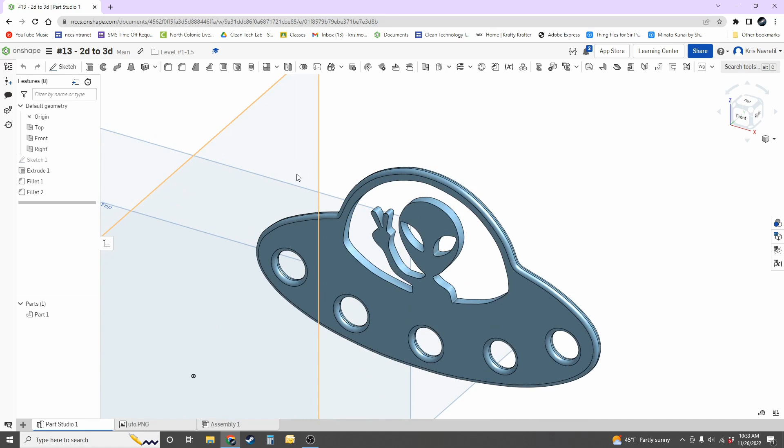In this video we're going to be taking a look at the next part in our Onshape series, the next level. And this one is going to be pretty simple. It's just taking a 2D image and essentially making it into a 3D object. Now we've done this a couple different times, a couple different ways. We've done it with the keychain, and we've also done it technically with the screwdriver handle.

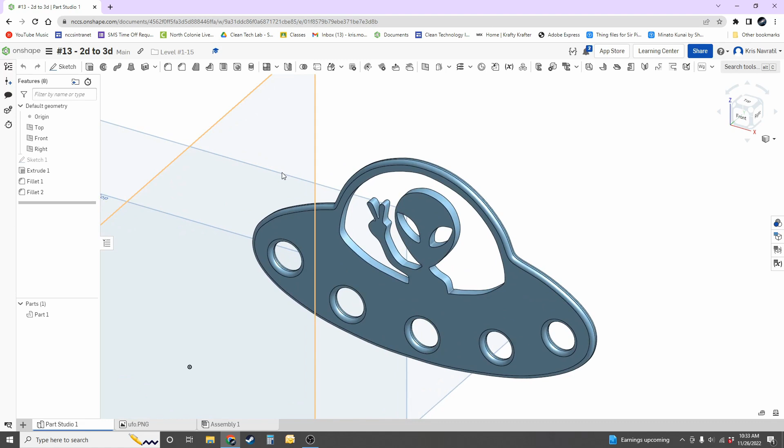But in this sense, we're going to be finding an image that's a little bit more complicated than those two. And it's also one of the first opportunities really in our Onshape levels that you're able to choose exactly what you want to create your image of, and then, of course, make it into a 3D object. So I do have an example. It will be posted on the Google Classroom. You're more than welcome to use mine if you'd like, or you could find your own image.

It is important when you're looking for your image that you do find something that has almost that silhouette kind of background, just like we would be finding for a vinyl cut sticker. But you need to keep in mind that the entirety of the object needs to be connected. There cannot be any pieces that are separated from one another.

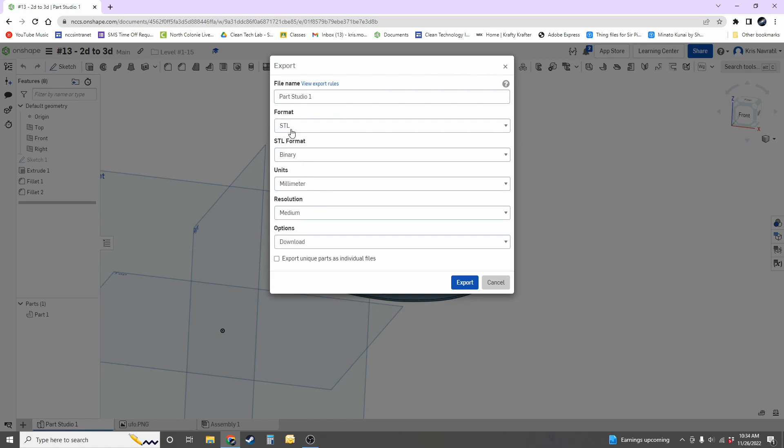So for instance, if we were to bring this over to the 3D printer, if we go to Part Studio 1 here, right click and hit export, and then we make sure that it says millimeter and as an STL, and we could just type in UFO. If this was to get sent to the 3D printer, everything would be printed as one piece. And again, very similarly to our keychain design, if we were to print this, you could put a keyring on it and make it a keychain, right?

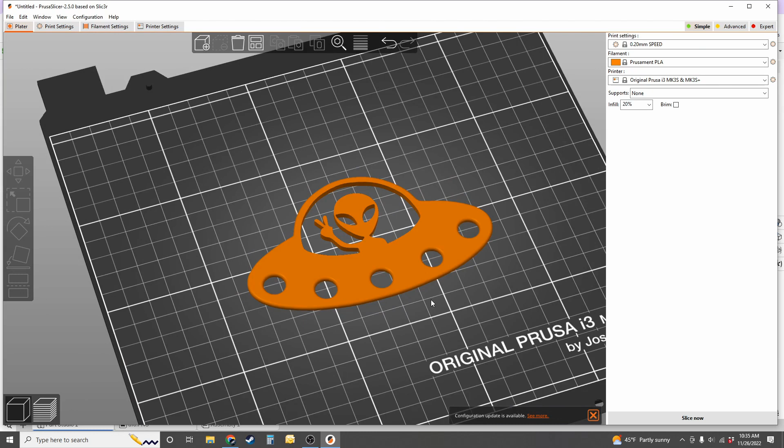So keep in mind, if you do choose a different image, you are going to have to try and find something that is all connected as one piece. That's going to be very important. Okay, so let's get into this. There really isn't too much new information about how to create this in Onshape. So we're going to go back to the dashboard here. I'm going to hit create like we always do in the top left, and then document.

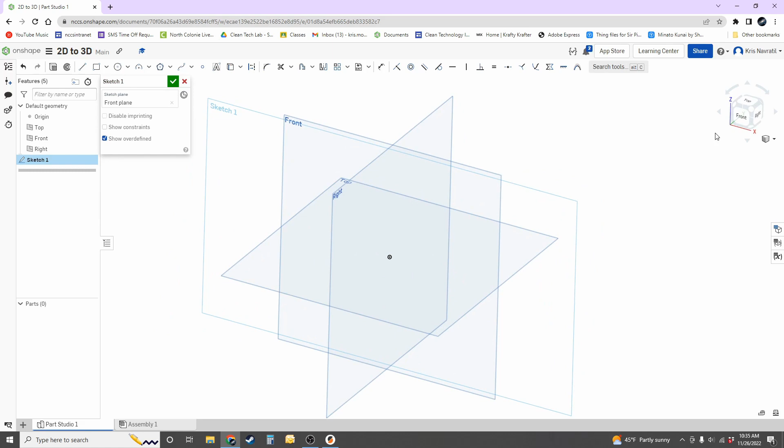And for this one, we're going to be calling it 2D to 3D. It's just a pretty simple concept. And we'll hit create. Now, same as with our vinyl cut sticker or the keychain for images, we are going to first come up to where it says sketch, and we can go ahead and hit on the front view here, and that puts in our digital piece of paper. We're going to click the front on our view cube so we can look at it straightforward.

And now we need to upload an image that we have found. Again, you can download the one that will be on our Google Classroom, just this simple UFO design, or you could find your own. We're going to come up to the little arrow next to this page icon, and we'll hit insert image as we've done before. Keep in mind that when this pops up, if you cannot see the import button, you're most likely on a Chromebook where the screen is not large enough. So you're going to have to go to the top of your keyboard and find the full screen button, and that should give you access to clicking on import.

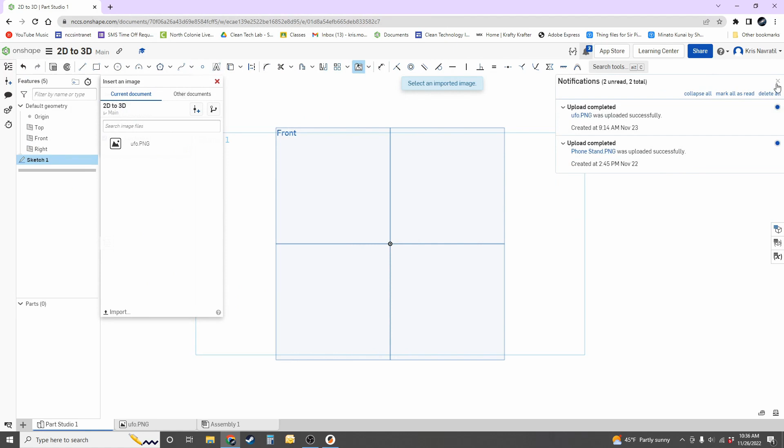So we'll go there, we'll hit the desktop. I did already download this here, and I'll hit OK. This is my UFO PNG. So I will click on the image. I'll come over here. I'm going to click once on the origin and then come up and click again. So as always, we are simply just going to be kind of tracing along these lines.

Now keep in mind, if you're doing something like this for the UFO, for instance, we're going to have to do multiple tracings, and multiple loops would be a better way to describe it. So for instance, we'd have to trace around the entirety of the outside of this. We'd have to trace around the inside of the window here, and then we'd have to trace the two eyes.

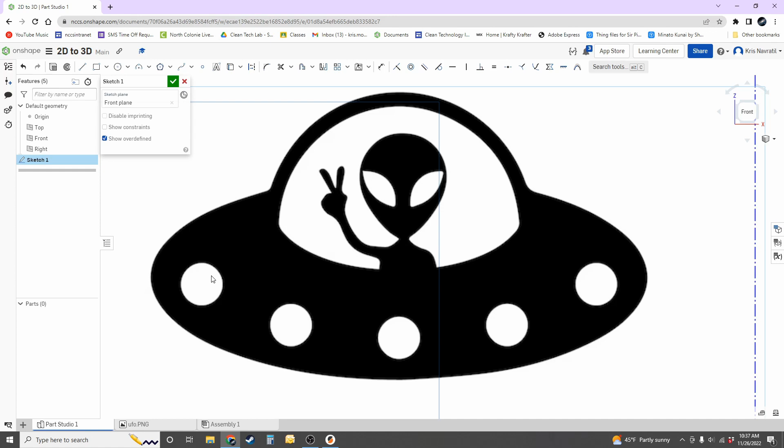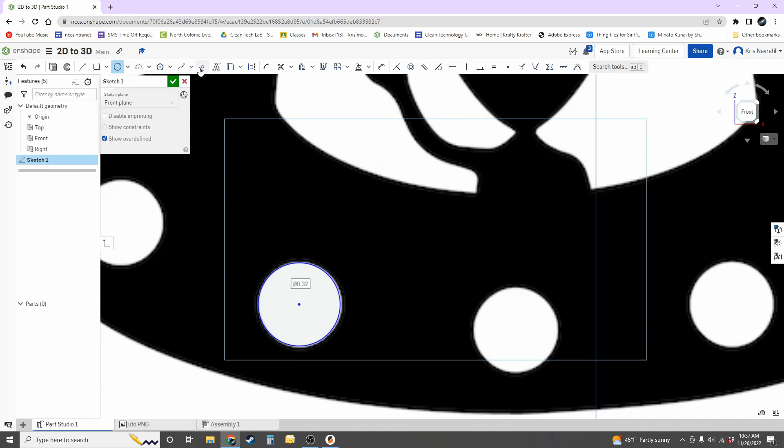And then finally, when we're going to trace these circles, you could use the spline tool as we normally do, or you could simply just come up and hit the circle tool and try and get an approximation of where it's at in the center, just like that. When we're going to make profiles for 3D printing, you don't have to use the spline tool. You're more than welcome to use all of the drawing tools that are at your disposal. So if we take a look at tracing this, we'll be back in one sec.

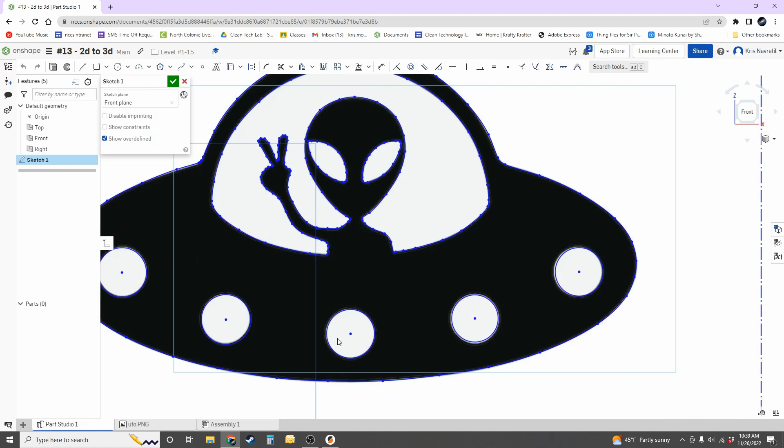So after you have traced along each of the edges that I was describing before, we should be good to try and extrude this object. Keep in mind we did the outside, the inside, the two eyes, and then I just used a circle tool to do these circle tracings on the inside. So we'll hit the Finish Sketch button here. We'll change our view so we can see what's going on here.

We're going to come up and we're going to find the extrude tool right next to sketch, and then we can just simply click on the actual ship. Now hopefully you made a complete loop everywhere that you needed to. If it's not letting you click there to extrude, you need to go back in the sketch and make sure that every single thing that you traced was in fact a complete loop.

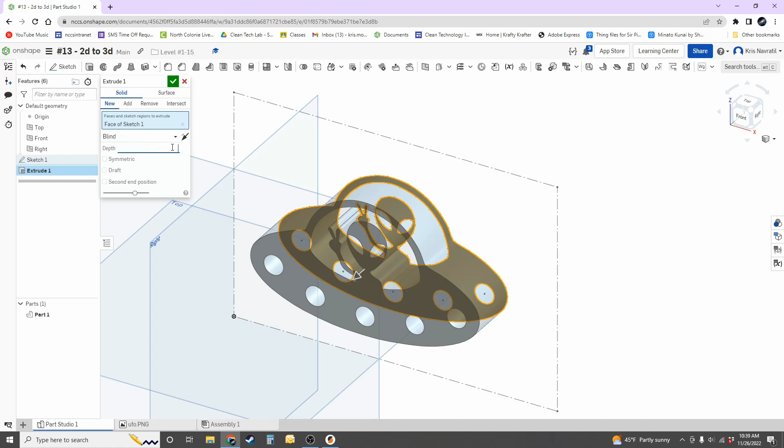Now we're not going to do an inch here, it seems a little unnecessary, so let's do something similar to our keychain at 0.125, and then we can go ahead and hit the green check mark. So there you go. That is essentially how you create a 3D object from a 2D image. This can be used to do a multitude of different things.

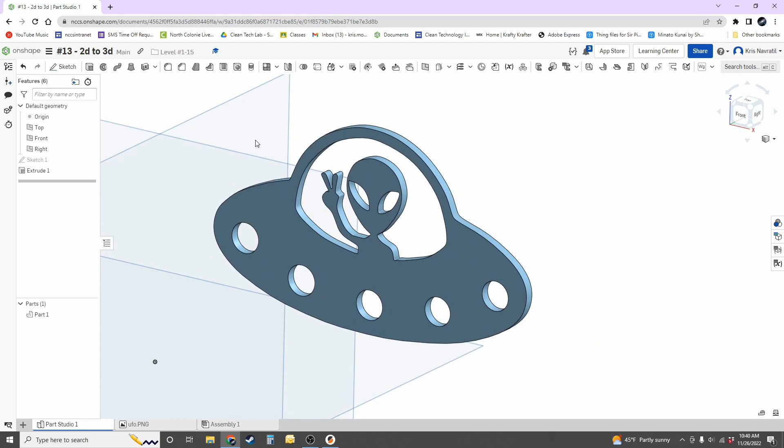If we were to print this out, we could make it into sections, make it very large. We could use it as an art piece on a wall. We could 3D print it small enough to make it a keychain. There's a bunch of different things you could do once you've created the item. Now, if I was to make it a keychain, we could make it look a little bit more official than these kind of hard edges.

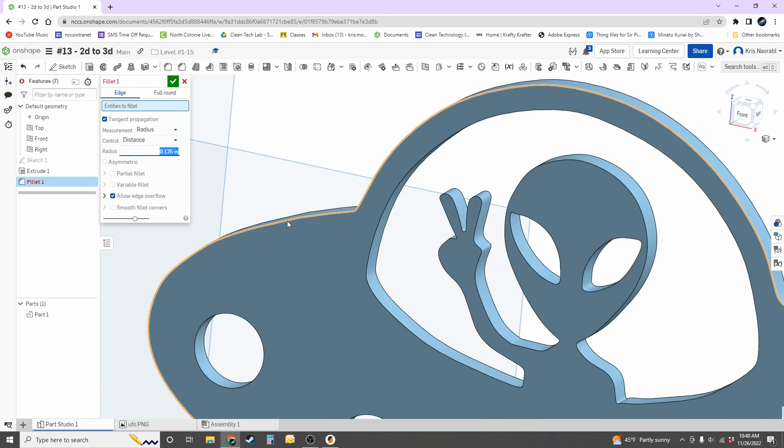So we can just simply come up and find the fillet tool here. And remember, this tool allows us to click on edges and automatically round them over. So it's currently set to 0.125. So just as an example, if it's set to something too large and you go to click on the edge here, it won't let you do that most of the time because it's too big.

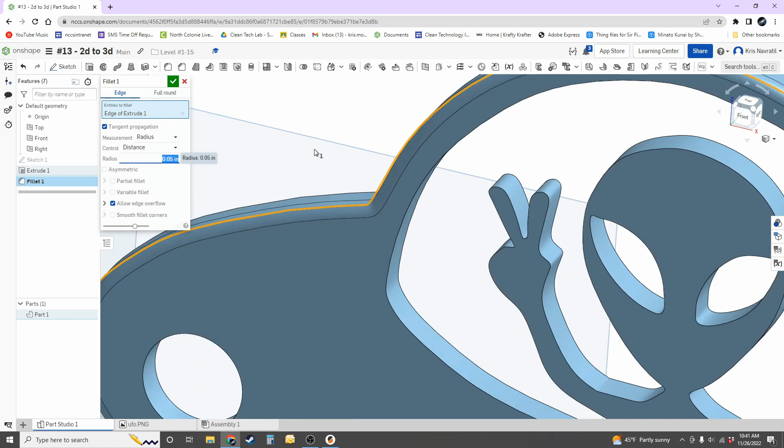So if this was, again, by default set to something larger, you might end up with these red lines. And all that's saying to you is, hey, the radius is way too big. We're not going to be able to create that fillet for you. So I'm going to go back to the 0.05 actually. And you notice that rounded over this whole corner for us.

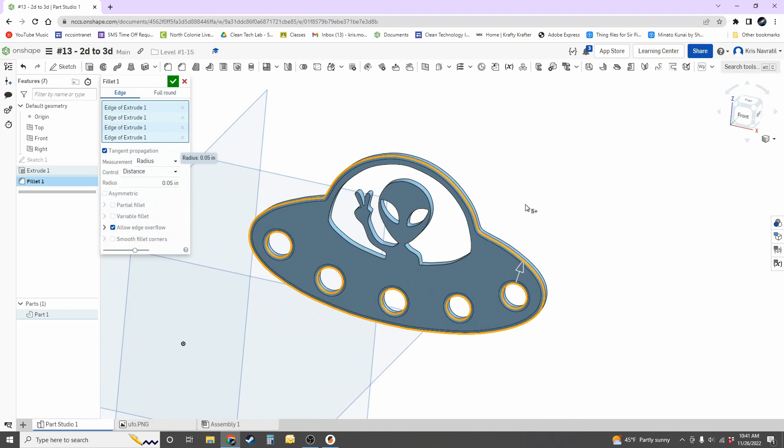I think it would be cool if maybe we did the insides of these as well. Be mindful, you're not clicking on surfaces, you're clicking on edges here. So I'm just trying to click on the edge of this circle. Right there, right there, right there, and right there. And maybe we want to do the back too. Let's kind of keep it consistent. Just like that. And then I can go ahead and hit the green check mark.

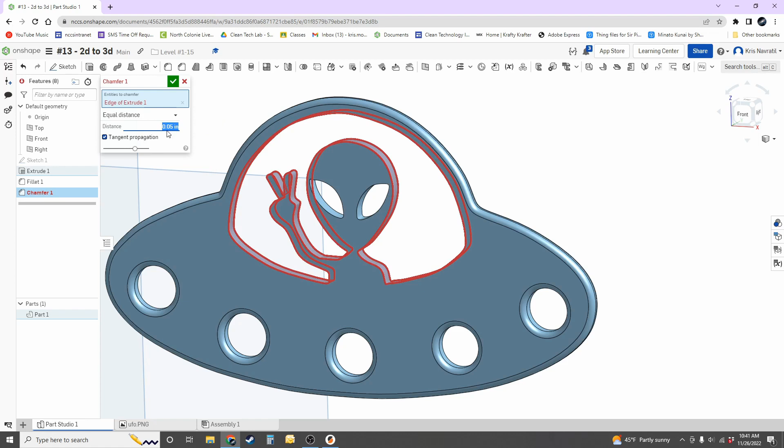So this does look a little bit better now that things are rounded over. Keep in mind, you don't have to use the fillet. You could also maybe use the chamfer tool and just cut the edges off of things. Now, you might run into a situation where where you're trying to click is just always going to be red. It doesn't even matter what you're adding in for the radius or the distance.

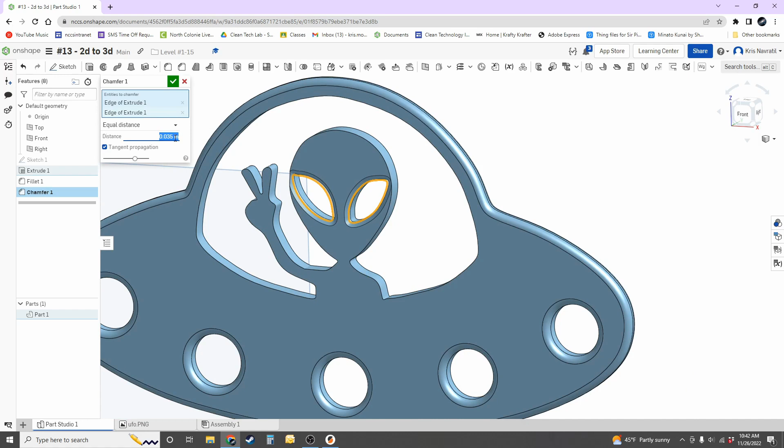For instance, this spline that we drew on the inside here is just way too complicated for the program to add in any type of chamfer or fillet. But maybe we can try the eyes here. That looks kind of cool. Maybe make it just a little bit smaller than that so it's not falling off. Awesome. And there you go.

So again, you do not have to choose this image. You can choose it just to complete the level and move on. And if you're curious about which pictures might work better, you can just ask me in the lab. And that is how to create a 3D object from a 2D image.